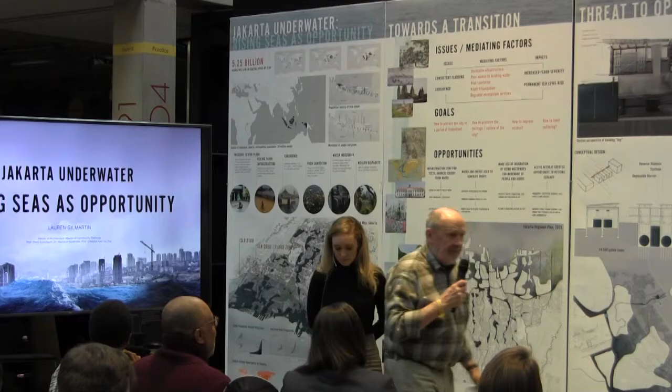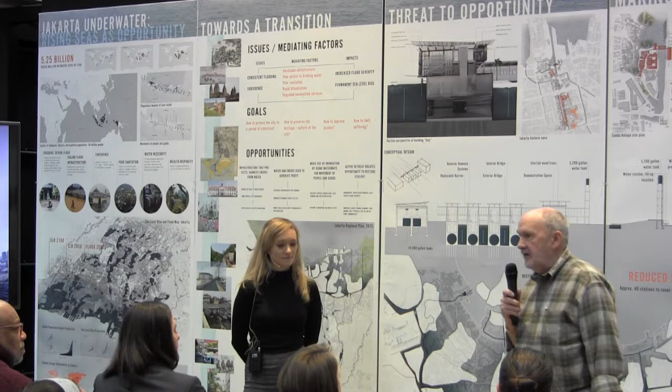What is the thesis process? Last semester, these students did research. They wrote documents, visited sites, and looked at precedents and examples that would inform their thinking. They put together a series of chapters on each of those topics, site analysis, program analysis, etc. This semester, of course, they spent all their time designing, and then at the end they clean up all their pre-thesis work and put it into a nice package so they can inform you about their thought process. So it's essentially a one-year exploration, but the actual design is really just one semester. The production is geared that way.

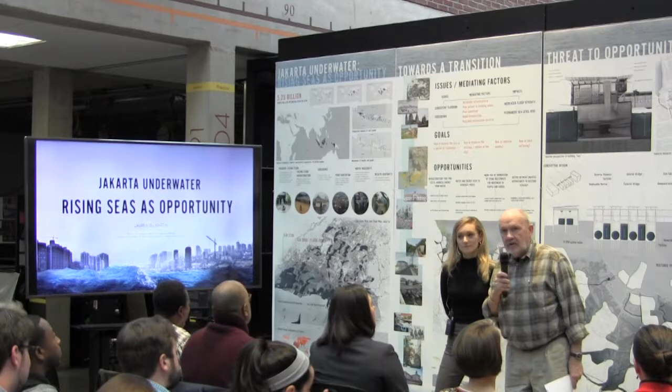Now we're going to go over to the other side of the world to Jakarta, and we're going to look at a place that many of you have probably read about, this whole decision about whether to save Jakarta or move the capital, and what we're going to do about climate change and the rise of sea level. So Lauren's going to take us there, and thank you.

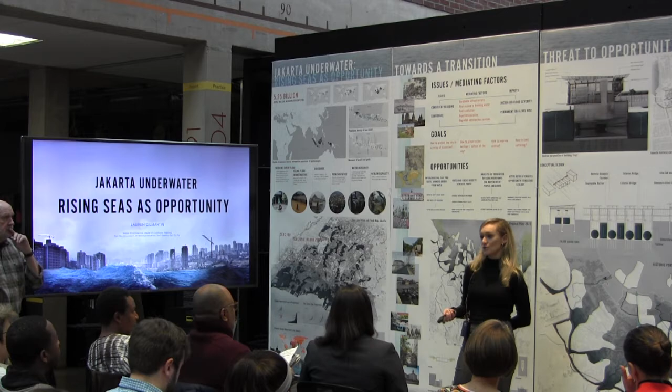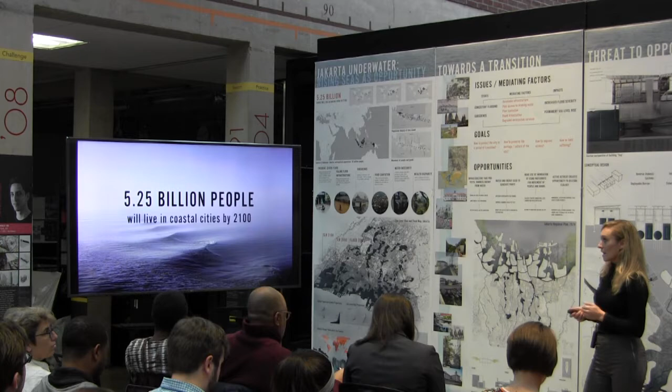Jakarta underwater, rising seas as opportunity. Today I want to talk about a statistic that I read in a UN report that said that in the next 75 years, 5.25 billion people will live in coastal cities. And this won't be uniform across the globe. Today our largest cities are New York, Mexico City, Manila, Tokyo, Jakarta, etc. But this global shift and boom in urban population will actually occur in the global south.

This growth is going to occur in Asia and Africa, primarily in developing cities where infrastructure has not kept pace with urbanization. To give you an idea of why this is a topic we should be talking about: 1 in 4 people in cities live in slum conditions globally. 9 in 10 people in cities breathe polluted air. Only 38% of cities treat their wastewater. 50% don't have access to waste collection, and 785 million people globally lack access to clean drinking water.

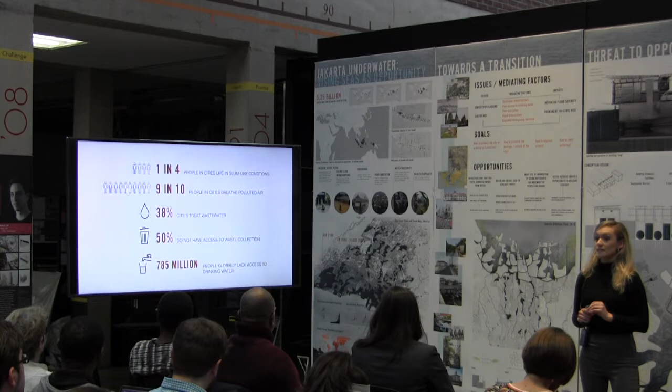This is true for Jakarta, Indonesia, and I'm going to go into some of these challenges. But before I do, I want to take you all on a trip to Jakarta and talk to you a little bit about my research and what I observed while I was there.

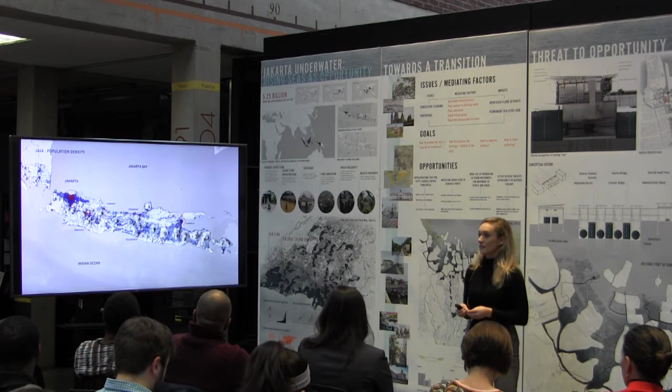Jakarta is the capital city of Indonesia. It's located in the Pacific and Indian Ocean. It exists on the Java island of the entire archipelago. Jakarta has a population of about 30.8 million people in its metropolitan area. It's of course the capital, and it's the most populated city in Indonesia.

And it has this really rich and interesting history. It's been settled for a long time, originally as a port city, and has undergone many influences, including colonization from the Dutch, occupation from the Japanese during World War II, and finally gained independence in 1945. It has a really rich maritime culture that began many years ago and still exists today. It was a really important stop along maritime Silk Road trade routes and the Dutch East Indies trade routes, and it primarily traded cloves, cinnamon, coffee, etc., and fish too.

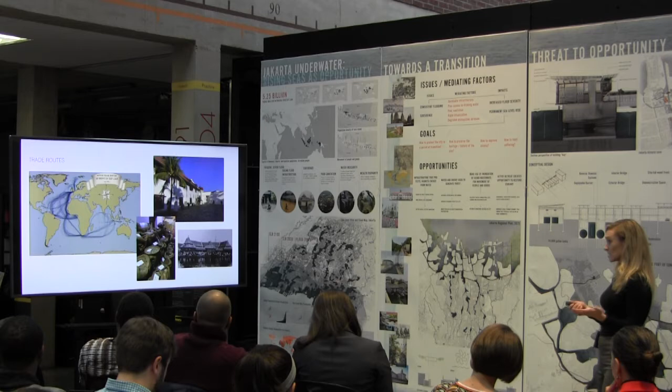Today, while walking through the city, you can really understand and see all the influences that the city has experienced over time. It's a really rich culture of different demographics and economies. You can see the old Dutch architecture, experience the maritime culture, and see some of the ancient mangroves. It's a really interesting and beautiful city.

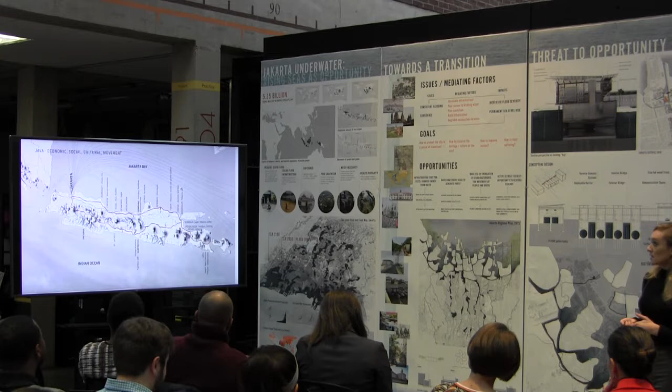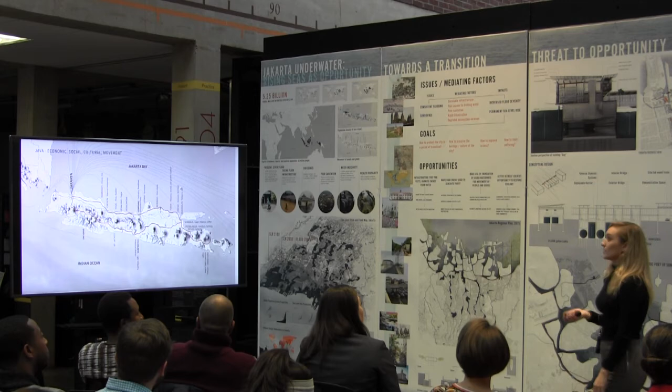Jakarta today is still a really important stop in trade routes. It's the one city in Indonesia that still serves as its export port. So all of the goods and services exported from the country come to Jakarta and then are distributed throughout the world. It's still a really important economic city globally.

Jakarta's main historic core was developed mostly during colonial rule, but its largest urbanization period actually began in 1970, and from 1970 till today it's exploded and become an extremely urban, dense environment. That rapid urbanization has led to some really big challenges that the city is facing today.

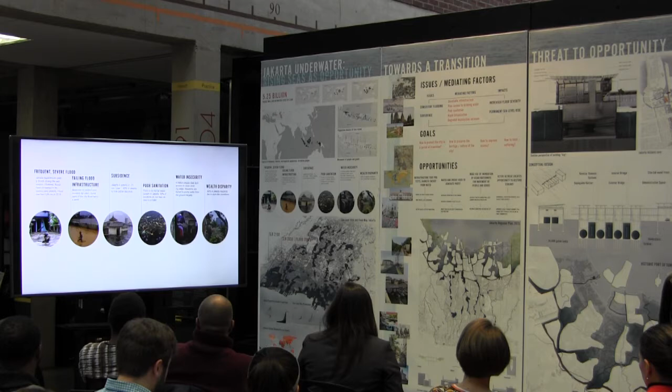Frequent and severe flood is a common problem. Every year the city floods, and some parts of the city flood almost every week. The city has experienced frequent and severe flood more consistently and more frequently. There's a lot of failing flood infrastructure in the city — mostly seawalls, trash piles, and sandbags that keep water out of inundated areas.

There's very poor sanitation here, so the city doesn't have any formal waste system. Only 30% of residents have access to a toilet. So sanitation and pollution is a really big problem in this city.

This extreme pollution has caused severe water insecurity. Even though there are 13 rivers that run through the city, every single one of them is very polluted and too polluted to drink from. This water insecurity has left 5 million people in the city without access to water. Most water in the city is not piped, it's actually pumped out of the ground, and the way residents are getting water is by pumping it illegally, which is causing severe subsidence in Jakarta.

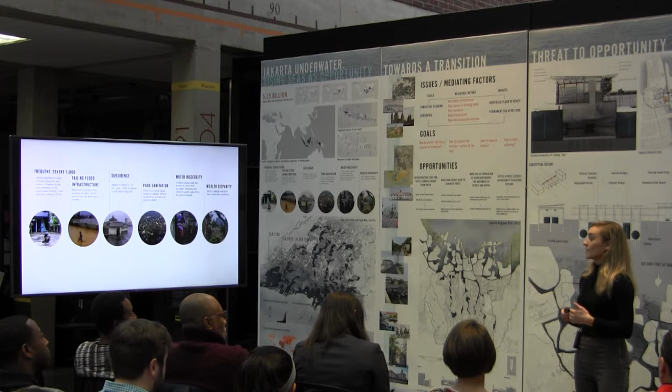Parts of Jakarta actually sink up to 25 centimeters a year, and you can really see this throughout the city. These are all challenges that the city faces today that they'll have to deal with in the future.

In addition, these are some of the observations and obstacles I experienced while traversing through the city. The sanitation problem is really apparent. There's a lot of physical and dangerous barriers that make it hard to walk by foot in the city. And you can really understand the poor housing conditions and the threat of flood when you're walking through.

Compounding all of these challenges is the threat of sea level rise in the next 25 to 75 years. The dark blue areas here represent frequently flooded areas. This pink line represents projected flood by 2050, and the second one behind that is projected flood by 2100.

Because Jakarta has experienced this sinking problem, about 40% of the city already exists below sea level. So even though sea level rise is a problem in the future, Jakarta is specifically at risk because any failure in its infrastructure can completely flood the city and totally cause a challenge here.

But this isn't a problem specific to Jakarta. A lot of cities are going to be experiencing this threat in the future. Mumbai, Lagos, Shanghai — many cities are going to experience the threats of sea level rise in the coming 75 years.

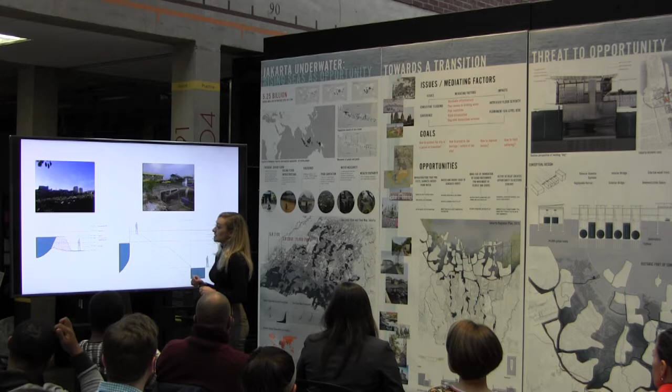Just to give you a little bit of an idea of the subsidence problem in this city, these are some of the areas that I documented while I was there. Most places in the city are holding back water with sand piles or trash piles, so of course not a reliable flood infrastructure technique.

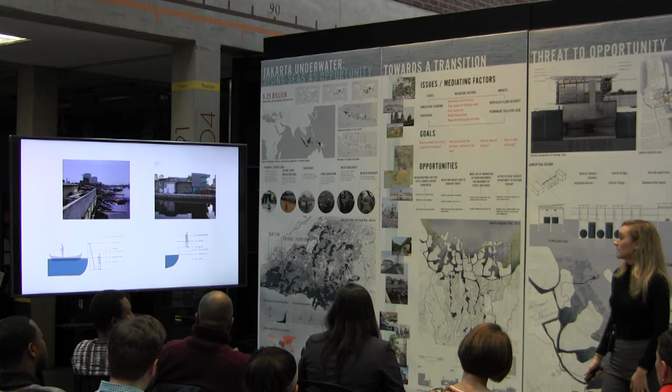There's a few pumping stations in the city, mostly seawalls along the north coast, and then a couple of bulkheads that bring you about 2 feet above the average sea level, but that of course doesn't block flood and sea level rise in the future. So we're going to have to rethink about how this city can protect itself in the future.

Recently, Indonesia decided to move its capital from Jakarta to another island to escape these threats, investing $26 billion into a brand new city. However, this investment doesn't include the relocation of its residents, so 60% of the city that can barely afford food, water, and housing will be left to fend for themselves when the city ultimately moves.

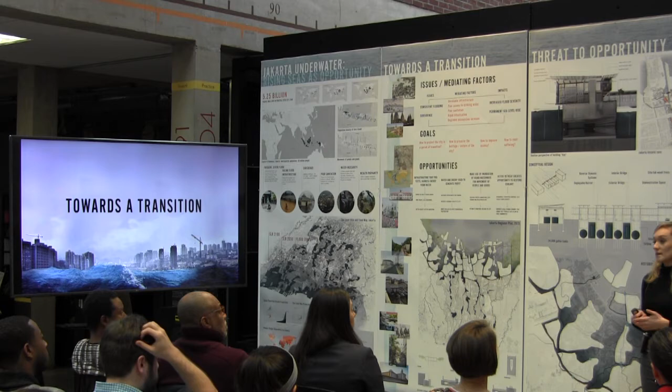So we're going to have to think about how the city transitions through a period of challenges and severe threats. Today I want to talk about how this transition can, instead of being viewed as a threat, be turned into an opportunity and used as a case study for how cities globally can deal with this problem.

Just to recap, some of the issues we're talking about here are consistent flooding and subsidence, which will ultimately cause increased flood severity and permanent sea level rise.

But there are factors in between that we can mitigate that could slow or halt these effects in the future: unreliable infrastructure, poor access to drinking water which causes people to pump out of the ground and leads to sinking, poor sanitation, rapid urbanization, and degraded ecosystem services. All of these can be attacked as problems to help slow this process or halt it altogether.

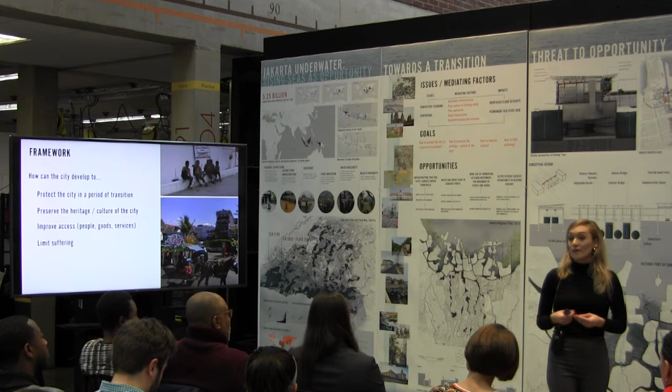So when we think about how a city can develop with these problems, we want to ask: how can we protect the city in a period of transition? How do we preserve the history and culture of the city? How do we improve access to people, goods, and services, especially in a city where it's really hard to get around, like Jakarta? And how can we limit suffering?

So something my thesis looks at is how these threats can be turned into an opportunity. I want to talk about a couple of opportunities in Jakarta that we can capitalize on towards development.

For example, the first opportunity I want to talk about is traditional approaches to infrastructure.

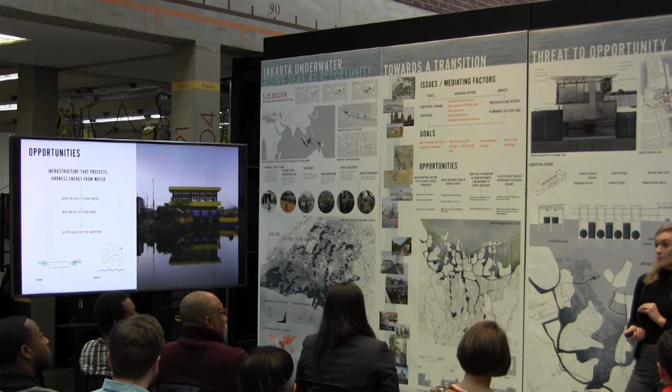We can implement infrastructure that not only protects, but harnesses energy from the water. In Jakarta, water has always been seen as an asset, so why not use it here as an asset as well? We can harness energy from water to create clean drinking water, which causes less subsidence and ultimately leads to better health and better sanitation. That water and energy can actually be used to generate a profit, and that money can be used to maintain infrastructure.

A secondary opportunity here is making use of inundation by using waterways for movement of people and goods. There's already a maritime culture in the city, and people get around by boat, so why not take advantage of this opportunity? It also relieves traffic congestion, which causes less carbon pollution. It makes a better city, so why not look at that as an opportunity?

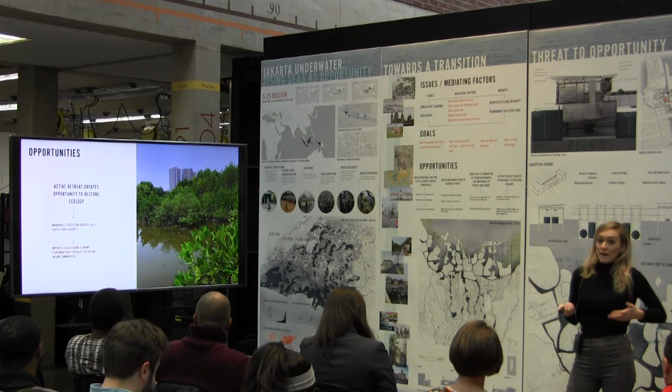And then finally, active retreat from dangerous zones creates an opportunity to restore ecology. Mangroves, of which there are already some in the city today, provide really important ecosystem services and reduce flood severity. And of course, local fishermen, which represent a huge economy here, can benefit from this development.

So I want to revisit a flood map of Jakarta versus a sea level rise map. I've looked at many scenarios about how Jakarta could develop in the future, but for the purpose of this presentation, I'm just going to focus on the one that I think is most feasible.

You brought me water. Oh, thank you.

Okay, so this is my vision for the future of Jakarta by 2075. I'm going to walk you through how I got here.

So I overlaid a map of common flood and sea level rise, and thought, okay, how can we adapt the city to take advantage of some of these areas?

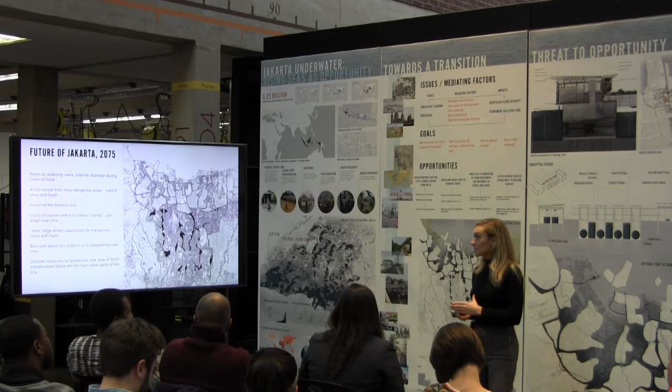So the first move here would be to widen rivers upstream so that you can automatically alleviate the impacts of flood. Next, you can build infrastructure islands in areas that either should be protected, like historic areas, or areas that aren't commonly flooded. And then finally, when water inundates over the next 50 years, the city is protected.

And the best part about this scheme is that it's adaptable over time. These islands that we're creating can be changed and adapted based on a changing future.

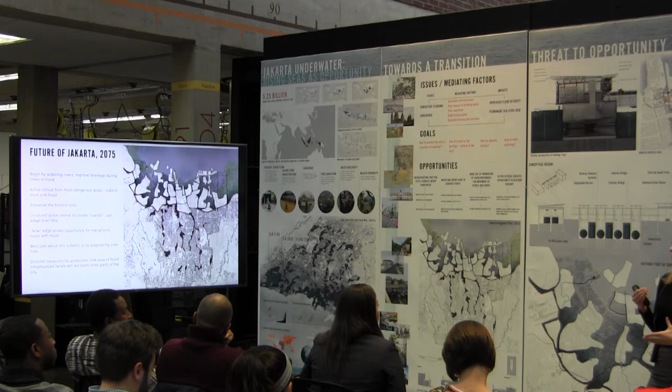And finally, this scheme helps to double protection from flood, because when infrastructure exists on an island, if the infrastructure of one island fails—and infrastructure does fail—it doesn't impact the rest of the city. Whereas something like an outer seawall dike, if it fails, it would totally flood the entire city. So this is an adaptable solution for the future.

So these levees can be used to improve access to the waterfront and create an amenity for the city, and preserve the historic core.

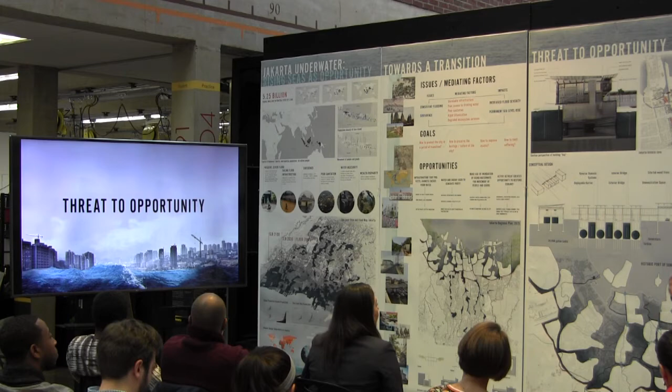So how can we actually do this? What's going to be the technology that we can use to actually implement this future? And how can we turn this threat into an opportunity?

So there are a lot of possibilities here to take advantage of energy from the water, to protect the city, and to provide clean drinking water to its citizens.

And I'm proposing to use tidal energy, which can provide energy to produce water through a reverse osmosis system, which can be combined with a deployable flood barrier to change with adapting sea level.

This reverse osmosis system is a perfect solution for Jakarta because it's compact and adaptable and can produce a lot of water at once. So one 40-foot by 9-foot system can produce 105,000 gallons of water.

It has a quick 4-year return on investment, and after that, a gallon of water can be sold for 0.007 cents, which is less than the average cost of water in the city. So not only can it be used to generate profit, but also provide cheaper water for the city too.

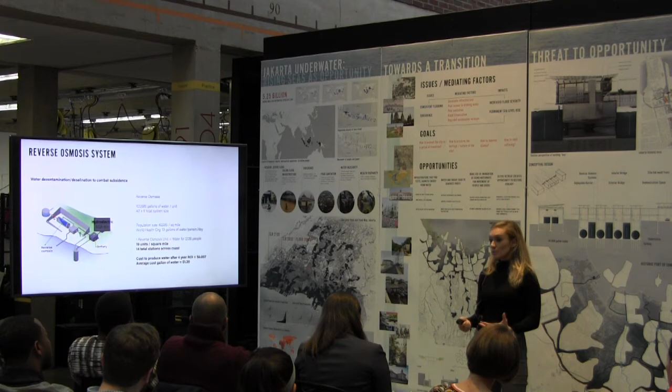So this reverse osmosis system would be powered by a turbine technology that actually makes use of subsidence and changing sea level to create energy.

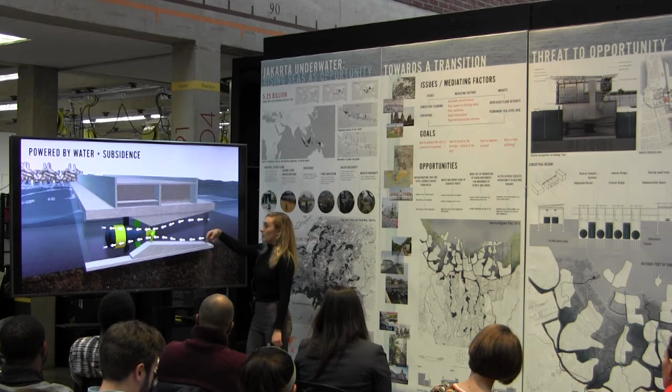So as water rises on one side, this turbine can be opened to produce energy with water coming through the other side, and vice versa, so it can flush water in and out.

So an opportunity for implementation: there are many opportunities around the city that can be used for implementation, but the best one for first deployment would be at Sunda Kelapa, which is the historic port in Jakarta.

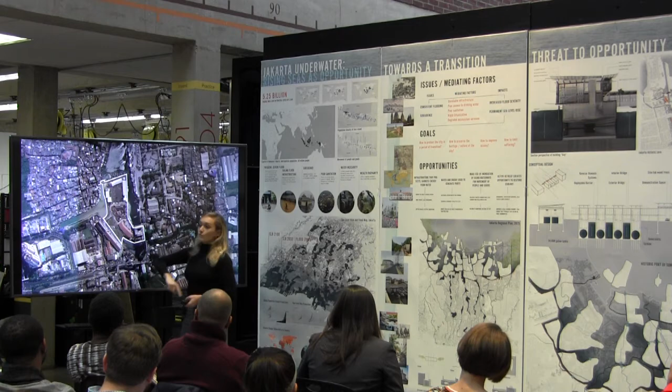This is an aerial view. So the concept behind my design here is that this building can serve as a bridge between the fishing community and their place of work.

And these reverse osmosis modules can be multiplied across that canal with a distribution portion and a demonstration portion that bookend the reverse osmosis systems.

So the way this building would work is there would be these turbines that exist in the water with deployable barriers in between that can move up and down with changing water levels. And above these are the reverse osmosis systems that are powered by that energy.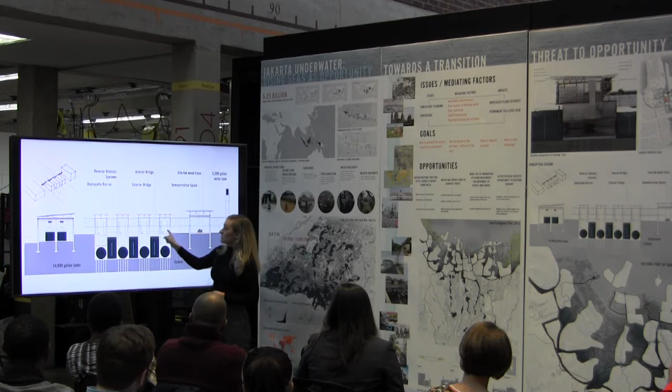And then there's a bridge, an exterior bridge and a service corridor bridge on top, that bring these programs together.

With this building and the way it's set up with a bridge between two, spanning the historic port of Sunda Kelapa, this building can now serve as a symbol, as a gateway to the city. So it exists on the historic core of the city.

So when you're coming down the canal, you can pass underneath this building in times where there isn't flood. That barrier can come down, boats can pass through, and you're passing through this gateway into the historic core of the city.

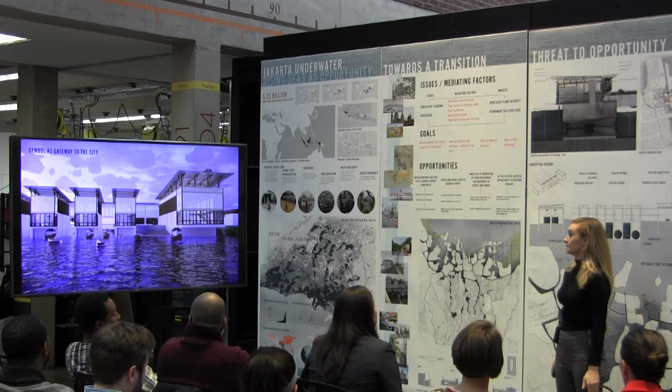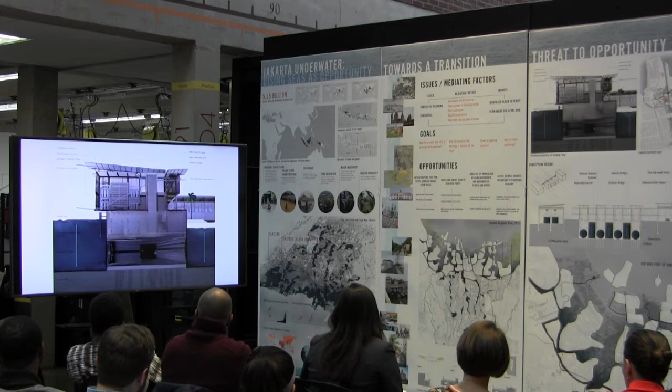This is a section through one of those modules, through the turbine and the reverse osmosis system. So as water rises on one side, those deployable barriers can come up, and the turbine regulates how much water can come in and out of the city and produces enough energy for 150,000 homes.

That energy can be used to produce the drinkable water, which is then distributed in the service corridor on either side of the building.

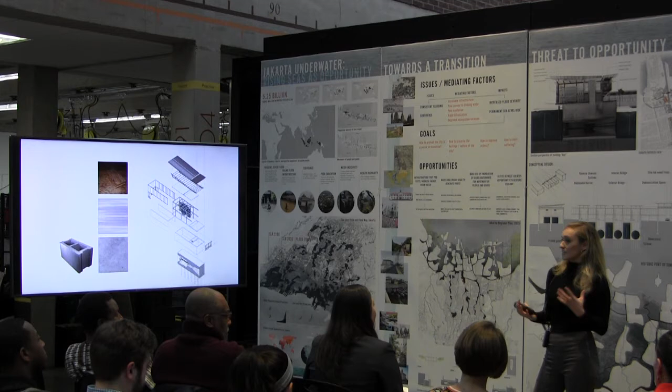So the structure is extremely simple. The base is a concrete base, and everything above it is polycarbonate panels and kayu kelapa, coconut wood, which is sourced from Indonesia. It has this really beautiful, fantastic grain on it and is used in traditional Indonesian architecture, so it calls to and identifies with traditional architecture, beckoning back to the history of building and wood architecture in this city and country.

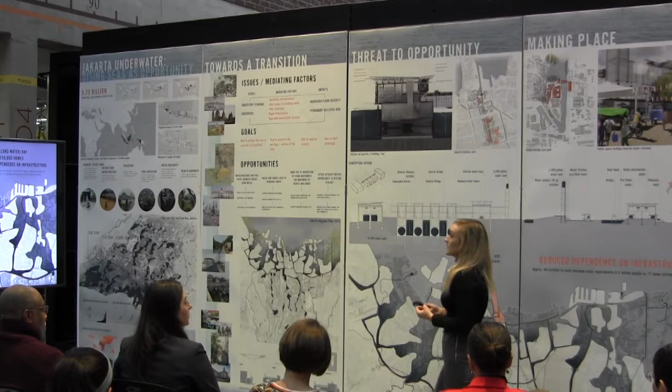So this is a repeatable scheme. It can be repeated across the city to provide those 5 million people who don't have access to water with water stations. One of these buildings can produce almost 1 million gallons of water a day, enough to service 60,000 people in 1 square mile. Again, it powers 150,000 homes. While 40 stations seems like a lot, it actually produces less dependence on infrastructure, because right now this city depends on 71 pumping stations and 159 flood barriers.

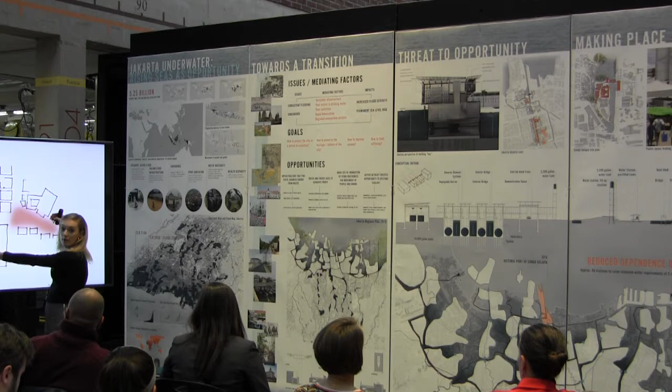So this building isn't only an infrastructure building, it can now be used to make place. The building sits along the canal and can open up onto 2 public spaces on either end of the bridge. The demonstration space side opens up onto a community, and the opposite side opens up onto an existing mosque and can service the people that work in the port.

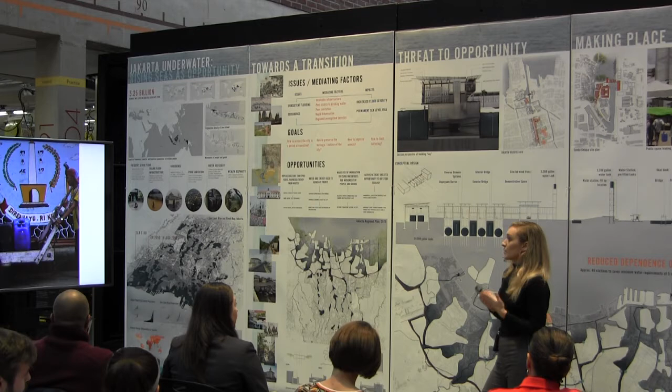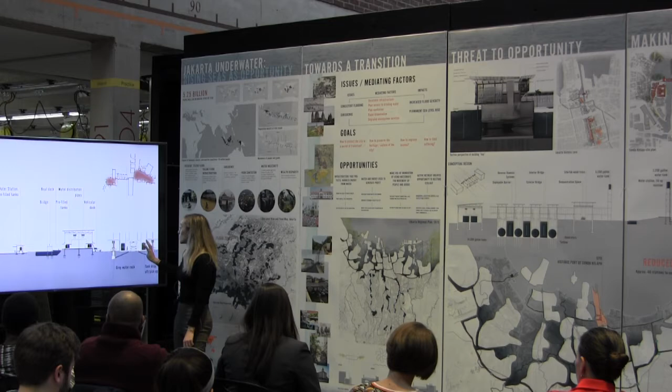Water distribution in the city is a really important topic because there is very little piped infrastructure for water, so water is distributed mostly informally by people in carts with water tanks. Why not take advantage of that and provide more economic opportunity by creating more jobs for water distribution like this? This is a view from the public space on this side to the water tower, where people can come fill up their water tanks. On the opposite side, boats and trucks can fill up their water in the distribution center. And finally, water can also be distributed by trucks that pick up and drop off tanks.

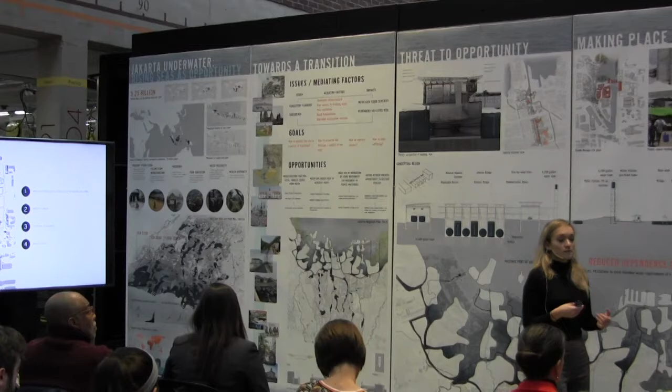Because this water now exists in this community, it can support other functions. With the availability of clean drinking water, why not also provide a bathhouse for people who don't have access to a toilet? My proposal here is to build this water plant that can service a community and a public bathhouse, so people have access to toilets and showers, creating a community space where this building reinforces an existing community.

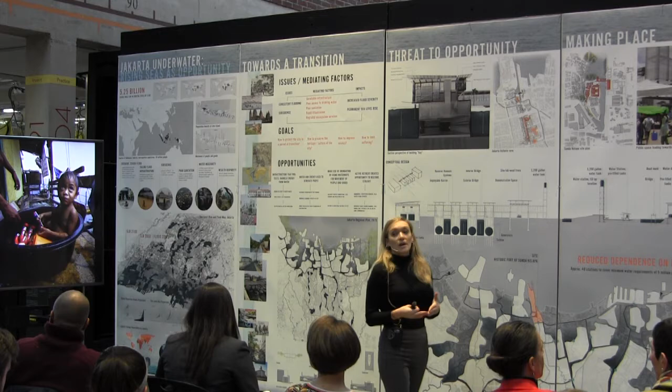The challenges of water supply and cleanliness make simple everyday tasks really challenging in Jakarta. $5.25 billion was spent last year by the Indonesian government to deal with the impacts of poor sanitation. So why not use this building as an opportunity to provide these services?

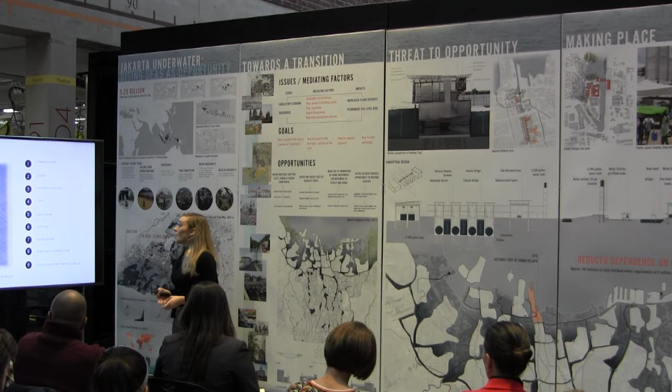My proposal is a community bathhouse, one for men, one for women, that provides a variety of spaces: a community space, laundry as an option here, a clinic where a traveling doctor could administer vaccines, a prayer room, individual bathing rooms, an infant room and a nursing room, and an exterior courtyard that creates a protected space for this program.

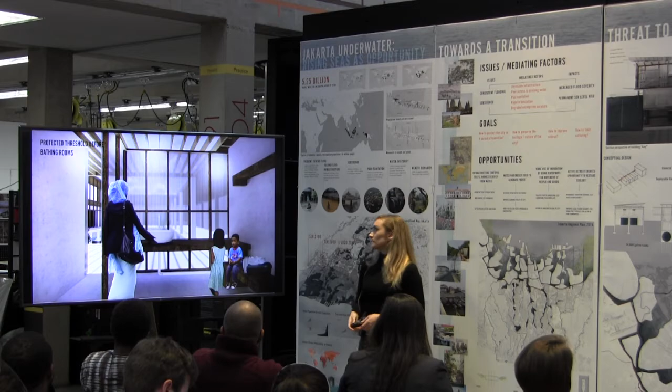And then finally, upstairs, flexible classroom and daycare spaces. This is a view from that protected courtyard with the individual bathing rooms behind these boxes, and a view from the inside.

This is a section through the site that explains how water is used here. Water is generated and pumped to either the distribution center or the water tank. This water tank services the bathhouses that come down the site into their own gray water and freshwater tanks. Those tanks service the bathhouse, and any wastewater is then funneled into an anaerobic baffled reactor, which cleans the water. That gray water is then released into another natural filtration system and can be used for toilets.

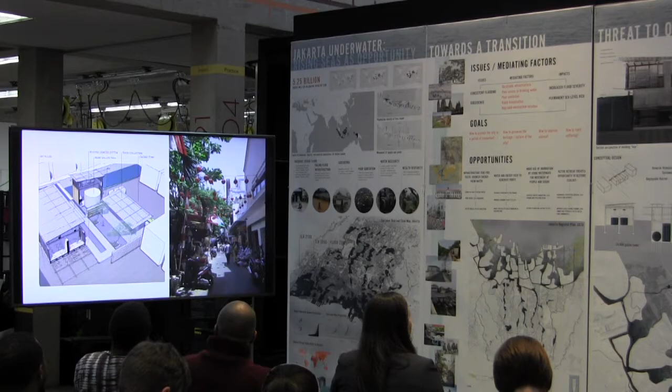This scheme is not only repeatable, but can be adapted to different conditions in the city. So where there are neighborhoods that maybe don't have as much space, or maybe canals aren't wide enough for the larger turbine system, there are other options for adapting this scheme to different conditions in the city.

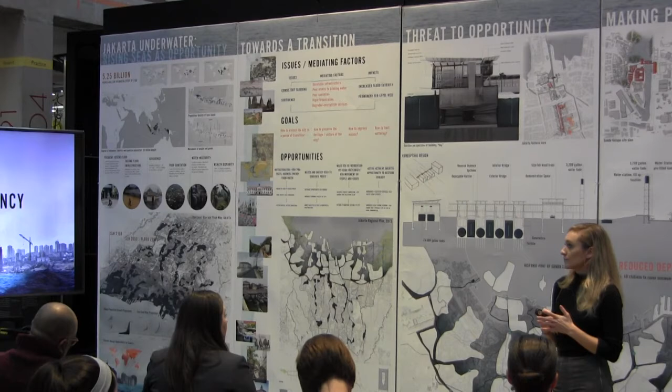And to finally talk about towards resiliency in Jakarta. So as the city transitions and people have to move or actively retreat from dangerous areas, we're going to have to think about how these communities can resettle elsewhere in better conditions. So for example, if the site is here, the community that lives in this area can actively retreat and resettle here.

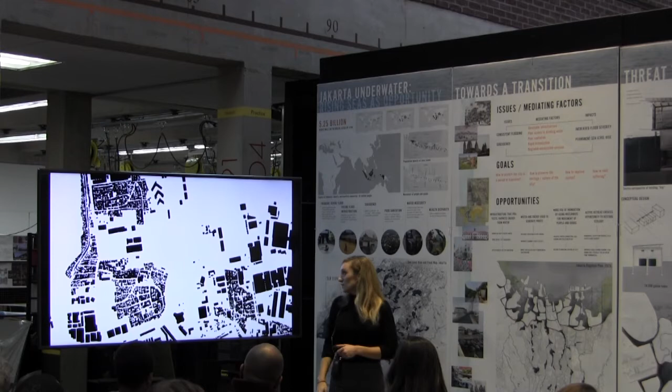Here's a figure ground. That area is right here. These are some of the housing conditions of that neighborhood. And something that I would really like to point out is that these neighborhoods are so packed and condensed that air and sunshine can't get into these houses.

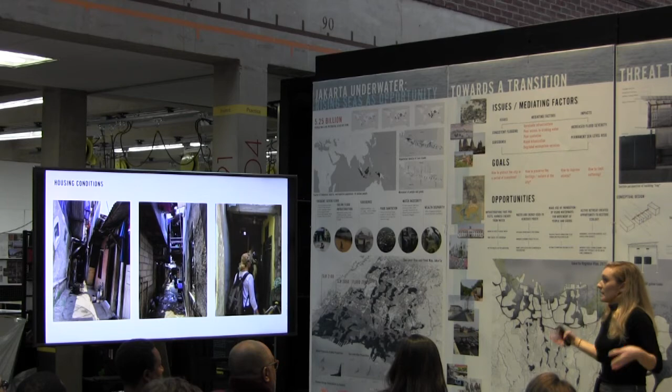So the typology here, the housing typology, is a block of homes, sort of like a shotgun style, but one family per room. And most of these alleys are about 8 feet wide, so it's really hard to get air and sunshine into these spaces.

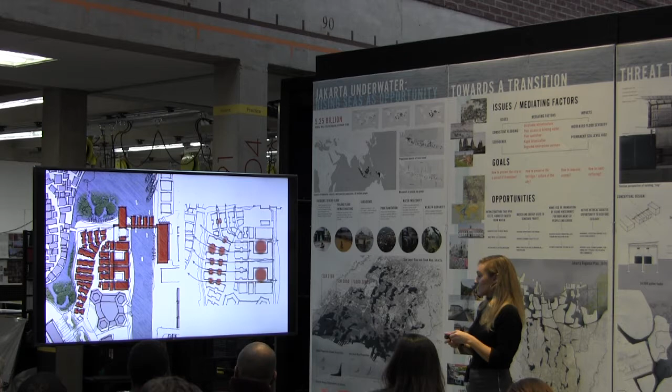So my proposal makes a slight modification to that typology by introducing courtyards. The way this would work is that families can get a 2-room unit that can then grow and adapt over time. But the important part here is that trucks can get in and out with a 9-foot driving corridor so that they can service the showers and toilets here.

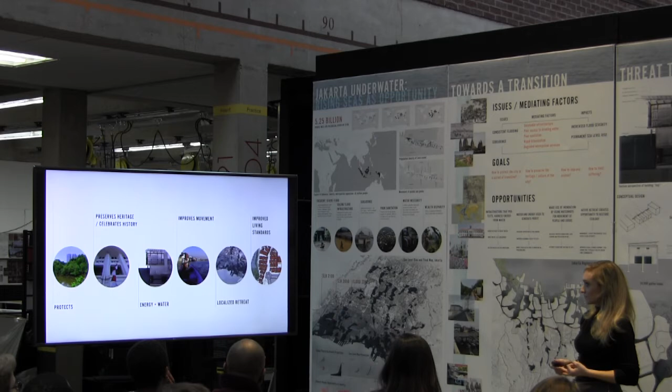So in conclusion, this project attacks the need to protect a city, preserve its heritage and history, produces energy and water in a city that really needs it, improves movement, provides a strategy for localized retreat, and improves living standards. And finally, proposes a solution that is practical and sustainable to promote healthy and dignified living with spaces between them that encourage community vitality. Thank you.

Where's that mic? No mic?

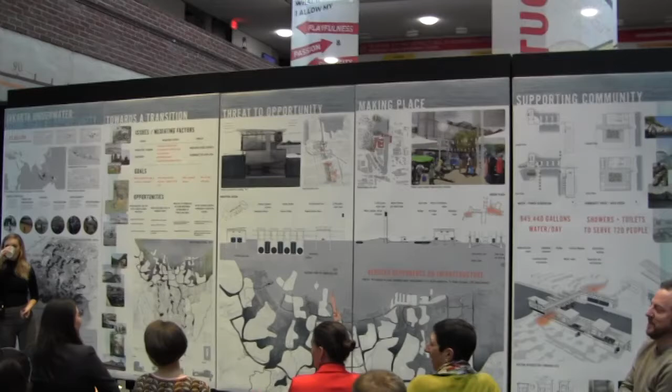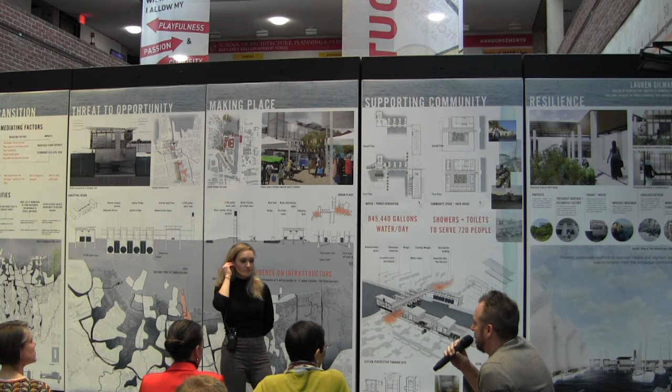Yeah, wow. So I don't usually just like to gush on a project, but I just have to start with that because it cannot be left unsaid. Like, this is a thesis, and the level of thought and the kind of importance of the thought and the way that you carried it out, from strategy to thinking to detail to execution across every scale, is incredible. And every time I thought you'd be done, you added something else that I would have said, hey, did you think about this? Like the bathhouses, and then the housing, and then, oh, by the way, I took this thing and I moved it over here and made it a little bit smaller, and like, wow, I'm impressed. I literally feel a little jealous of your thesis.

I agree. It's kind of mind-blowing how you've gone at all these different scales. It's also mind-blowing to look at these islands of cities and wonder what they'll be like. But that's not really the part of what we're here today to talk about.

Is the housing plan that you showed at the end here? Or No, it's only, yeah. I'll just get back here. Yeah, the units are up there. Right. I mean, this was just the final grace note that you even got down to this.

So I really just have questions at this point. The turbine technology exists? Does exist, yeah. And the economics of it? Have you had a chance to? That's a little unclear. Yeah, it only exists in one city in Swansea Bay, Wales, and it's pretty new, so we'll see how it goes in the future. But tidal energy itself as a concept is used everywhere. So this is an interesting way to take advantage of not only changing sea and flood, but also the subsidence issue, where there's already a great change in water.

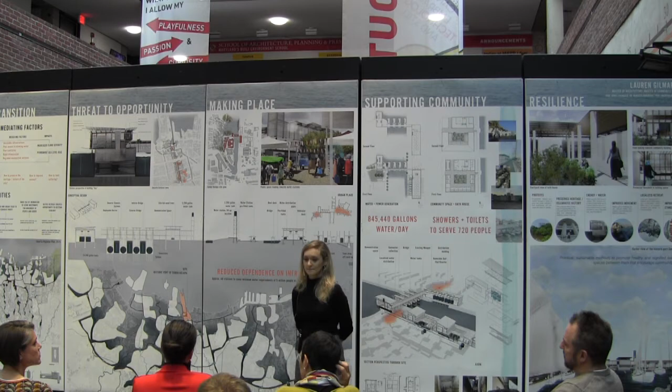Yeah, I mean, visually it's extremely clear and consistent and a beautiful presentation, like graphically beautiful presentation. Your drawings read really well. I appreciate that there's some hand stuff in there as well that are just simple and basic to show the ideas. The one tiny little bit of critique I would offer is just thinking about the aesthetic from this perspective of the historic district, and if that is kind of a main one or a primary entrance, does that have a bigger expression for it, or is it truly that these are just adaptable and they're the same thing everywhere plunked around?

That'd be the only thing I would ask. Yeah, and I think that's a question I've wrestled with throughout the semester: should this be something that's really affordable, or something that's a little more aesthetic? I mean, aesthetic and affordable can be the same, but you know what I mean. What should this thing look like, but how can it also be adapted over time?

So I'm also struck by the scope of what you've addressed, both the scientific aspect and the urban planning aspect. I particularly am interested in the housing aspect. I appreciated that you provided improvements for the residents who are being displaced. That's always a concern when you try to improve something in an urban setting—you end up affecting the people who live there. So you've given them opportunities as well.

It's a little depressing, though, that the issues we're dealing with here are the same issues: access to light and air, overcrowding, sanitation. Those are the same photographs that were taken 100 years ago by Jacob Riis in the U.S. So in a way, nothing has changed, even though we've thought about a lot of these things. But it's great that you're addressing them comprehensively and providing a solution.

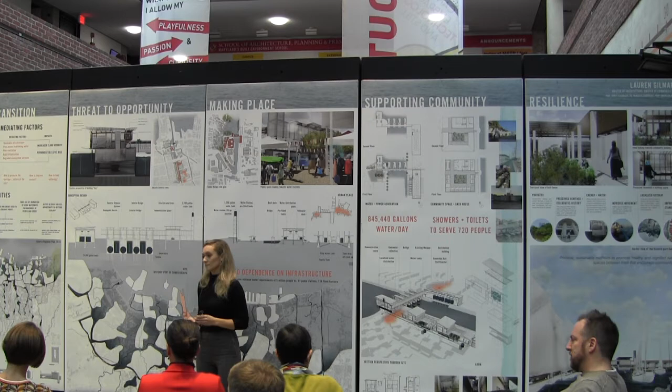So I would echo the praise that's gone around. I think from the global perspective down to the actual local and livability, you nailed it. So congratulations on that. Very wide-ranging, and maybe my one thing that I focused on, probably because I threw out my back this weekend...

...was the one thing I still see is people carting around water jugs. And I think, well, okay, if we're putting in all this infrastructure, are not some pipes a way to manage some of that? Because I think about people aging and being able to manage water in that way, and carrying around—I don't know how much those jugs weigh. But yeah, I think that would be an issue.

But beyond that—you can address that if you want to—I would just say that I love how your perspective renderings, even though they're computer generated, really feel like occupied spaces. They look realistic, they look livable, I can believe that they are implementable, and they really show your deep understanding of how people live here and what challenges they're striving through, and how we can help improve them with very logical, implementable solutions.

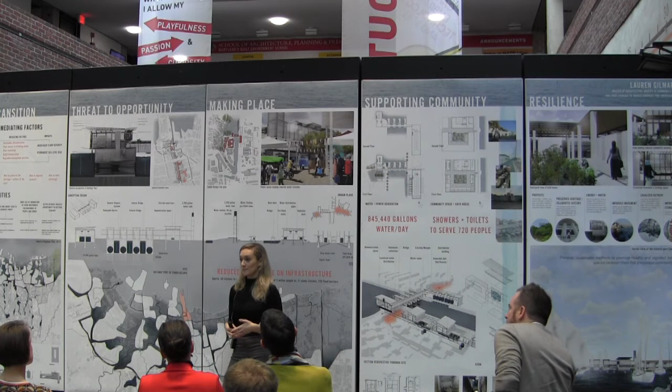But yeah, you can address the water jug, I'm sure you have an answer for that. So, like I said, water in Jakarta is privatized. There's no real municipal service—well, there is one, but it only serves about 3% of the city. So the idea is that this building could be implemented today and work within an existing system. But of course, over time, it would be ideal if a pipe system could be hooked up to this building.

And the others that could be multiplied across the city, and then, of course, better distribute water throughout the city. That's funny, I was just thinking of it as sort of like each one of these is a little franchise in a sense, that can expand and contract depending on the actual location and the width of the canal or space. So it's really good that you came up with a prototype that can be adapted depending on where it's located on your islands. So it's pretty good to see that.

Thank you. You really demonstrated your double major with this project. It's a really good demonstration of both majors, architecture and regional and city planning. So I applaud you for that. Thank you. Very nice, very good presentation.

I don't have much more to add, with the exception that one of the diagrams or the analysis I would have liked to have seen—and you probably have it—is identifying... you made it clear that 60% of the population is impoverished. Where's the 40%? Where is the 60%? Where are these pockets of people? Are they dispersed?

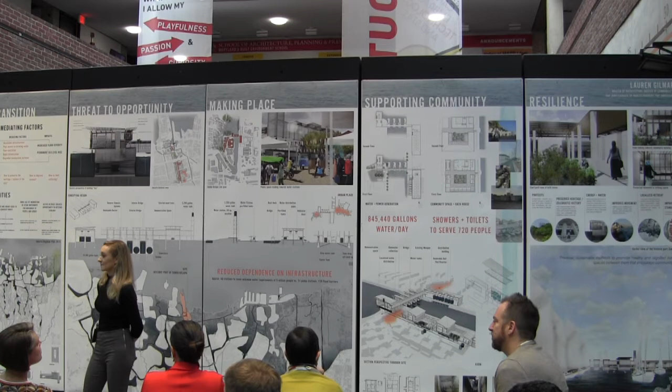Are they collected? How is this segregated city portrayed in an analysis? That would have been helpful to see how to attack that. And that's especially important with this idea of equity and trying to resolve these environmental justice issues.

I suspect that, and I hope not, but I suspect that many of these interventions might be happening in areas that the wealthy might live, or the corporate sector might live, that kind of thing. We certainly would not want that to be. Yeah, it's really interesting actually.

This reservoir that you see here, half of it is a slum and the other half are mansions. And the mansion side has infrastructure protecting it against the sea, the other half has nothing. So that really demonstrates the injustice in the city.

I suspect you picked the place and then found the problem. Other way around, interesting. So this is what you were interested in doing, and then you found the right place where you felt that this was, oh, that's interesting.

I think you should package this up and send it to the mayor of Venice as soon as possible. Given the problems that place is having, they do have a very large project to control water going into the lagoon. It's unclear whether it's going to work. Yours seems like a scale, and that's an enormous thing that they're putting at the entrance to the lagoons, and I don't think they've started building it yet, but clearly they have similar issues.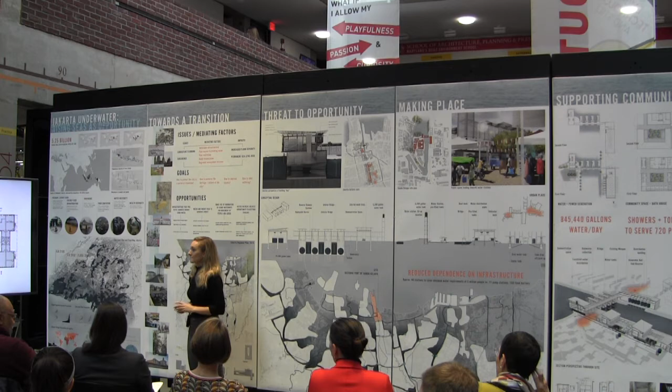It's interesting you say that, because I think one of the nice lessons of this project is the sort of way in which a thesis evolves. The thesis idea, and then trying to find it, and by the way, it's a beautiful project.

Thank you. One of the interesting things about the thesis process is that those intersections that happen along the way between what you're interested in and what the place demands of you. It tends to exist whether you're interested in it or not. The problems of Jakarta are there whether you do a thesis project or not. But what's nice is, I think, in the project is the fact that not only is the problem, a global problem, addressed, but also brought to a kind of very clear synthesis of what it means to this particular place.

It also makes me think that architects used to be much more engaged in problems of civic infrastructure. And it could well be that some of the imperatives today with climate change may in fact force us to become more engaged with those things.

It used to be that architects built power plants and built beautiful roads and things like that. And we did a pretty good job after World War II, because of the way the sort of scale of the world economy evolved, of consigning that to engineering and specialists and things like that.

And what I think your project does very nicely is it shows that you could actually intersect very important technological invention with placemaking and the architecture of the place.

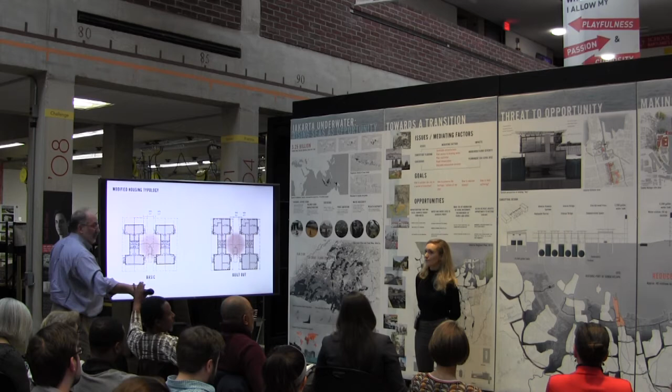Yeah, and just to add to that, I was originally interested in coastal cities because I was interested in the infrastructure piece. The water, energy, and sanitation part didn't come into play until I learned about the other challenges in Jakarta that you need to deal with to even start talking about infrastructure. So this project has evolved into something that tries to tackle other issues.

Just a follow-up question of interest: what happens with the submerged cities? I feel like there could be a whole industry built on exploring those, like marine archaeologists. But are some of those materials reclaimed? There are some nice city grids that are now underwater, but there's a lot of built material too—what happens with that?

And to add to that, my project has sort of been about: is it feasible to save the entire city? Should we just draw the line at the 2100 flood level and stop there, and everybody else has to retreat? Is that feasible? That brings up other problems—if the entire city is flooded, it's not just water now, it's buildings and water. So what's the right balance of reclaim, protect, and let go?

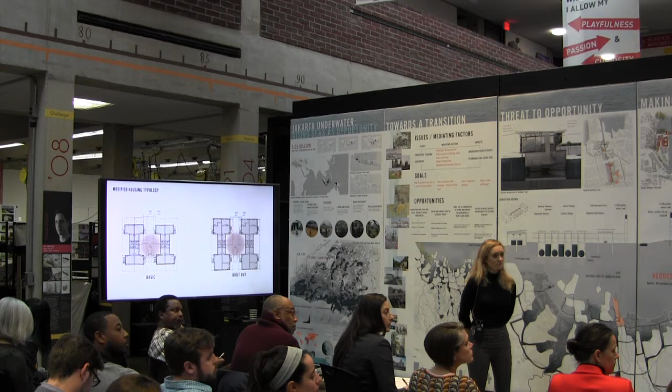Yeah, I had a similar question. I actually think this one example looks like something that could exist there—using the wood and the kind of form of it and the way you're making windows and surfaces. You showed a couple of images, like the one up there. I think the next part for me would be wanting, similar to past conversations, to really understand how this fits into the architectural strategy—materials and color. There was a beautiful waterfront building that was blue and gold; it was formally very similar, but a lot more colorful.

So I could imagine that being the next step—you've got all the pieces, you've solved the planning strategies, the scale, and the program. The next thing is, how could you push it? Is it a prototype that's replicated ad nauseam, or does it get redesigned using the same kit of parts but in a different way each time, depending on the neighborhood?

Yeah, I think it should definitely be able to be adapted, and the community should have some influence over what this looks like and how it plugs into an existing urban fabric. My goal here was to propose something that is simple, affordable, and realistic.

And if there was an opportunity to improve it or do something bigger and grander, of course that would be great. But after going there and talking to planners and engineers working on this problem, they all said that no matter what solution they came up with, it was always a challenge to produce something feasible within a time frame that would actually work in Jakarta. So my goal was to design something that could be implemented immediately and affordably.

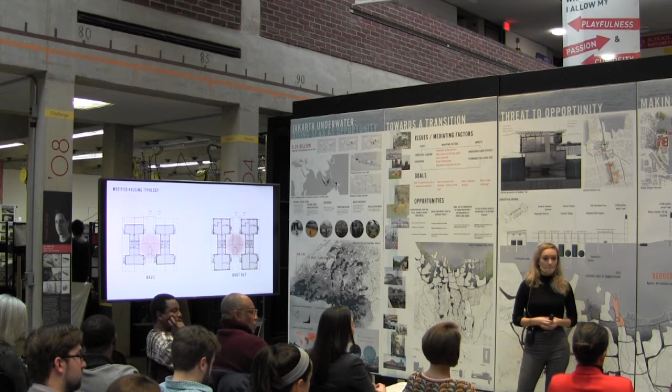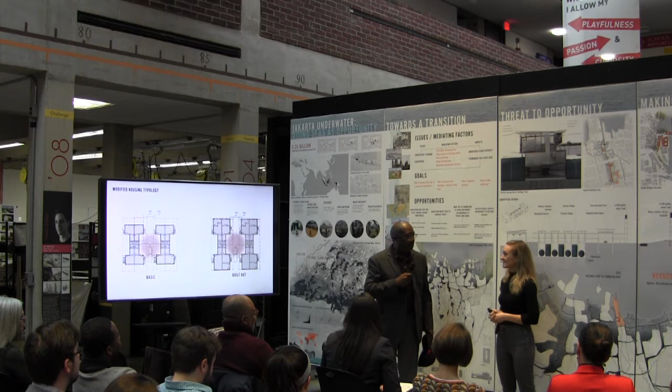Thank you, Mel. From all of us to you. Thank you, Mel. Good job. Can I give you a hug?

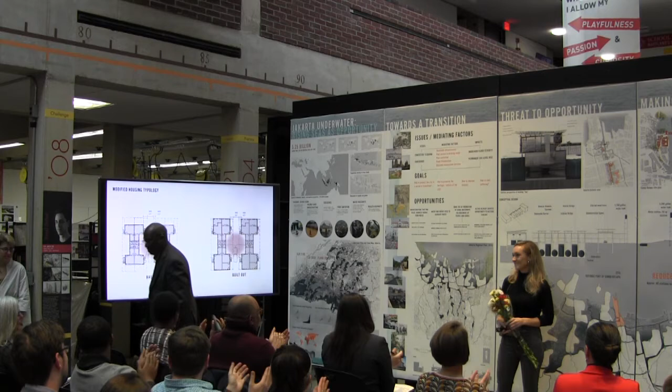Marcus and I co-led this, since Lauren is a dual degree student. So Marcus, would you like to say something? Yeah, I just want to say how grateful I am to have had the opportunity to serve on Lauren's committee. This has been a pleasure, and her ability to really demonstrate effectively the skills that she's gained through both architecture and planning. She did a remarkable job.

I also appreciate how she took us through some of these global environmental problems and potential solutions, but also took it down to a hyper-local level in terms of the reality of these things actually being implemented. Because we had discussions that even within Jakarta and the local area, from block to block, island to island, community to community, the dynamics could change. Being sensitive to those changes is incredibly important in terms of sustainable transitions and communities taking ownership, seeing a place for themselves in terms of this technological infrastructural transition.

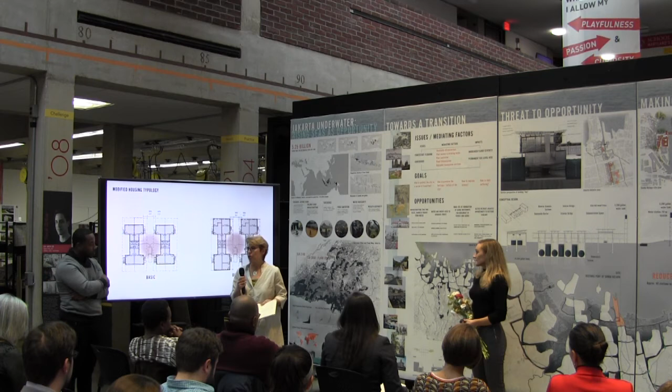So I want to start with your first question, which is, why is this a topic we should be talking about? I think that's such an important question for all of us to think about how we use our talents and our energy, because we're fortunate enough to have some choices. The fact that you started with that question, what is important for me to be thinking about today, is at every level so critical. Lauren and I talked a lot about the way in which we ask questions and how we frame questions.

And in the framing of the question and the rethinking of questions, it leads us to a whole different set of possibilities. We looked at the Rapido Housing Project, which is an idea about incremental change and rethinking of what happens, knowing places are going to flood.

So there are a few things I'd like to say about my appreciation for this project. First of all, you did start with a question and something you were interested in, and then looked for the place for that. And you started with this thread of water—her first image in the thesis.

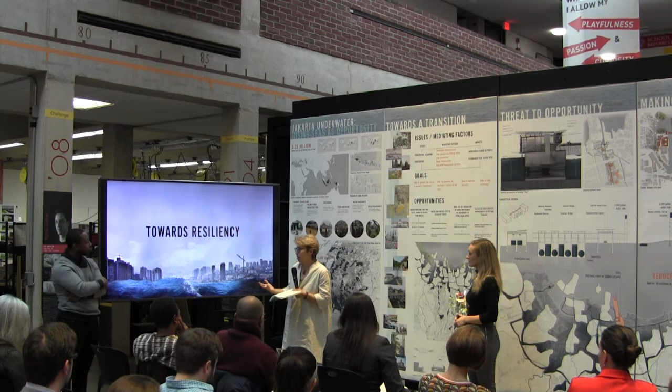This image, for me, asked the question in a different way. I think there was another part of it, because on one hand it showed that the city was being built upon constantly, and there was also the question of the idea—I'd only thought about the flooding in the past—but that the water coming in provided energy, that it could actually be a source of an economic engine. And it flipped it totally. We had an incredible conversation from that, because I had only ever seen it as a threat.

And I think it was that thread, pulling the thread of the water all the way down to the issue of sanitation and drinking water, how it affected the land and the culture.

Another piece of our conversation, as we read the news all the time, was why save this place? How do we argue for saving these different places, these investments? There was just an article about the Florida Keys recently, where the government decided they couldn't afford it.

So Lauren dug deeply into what's unique about this culture. As humans, we've created all these rich cultures around the world, and working to understand and build upon the assets and particularity of that culture in your choices, I think was also really key.

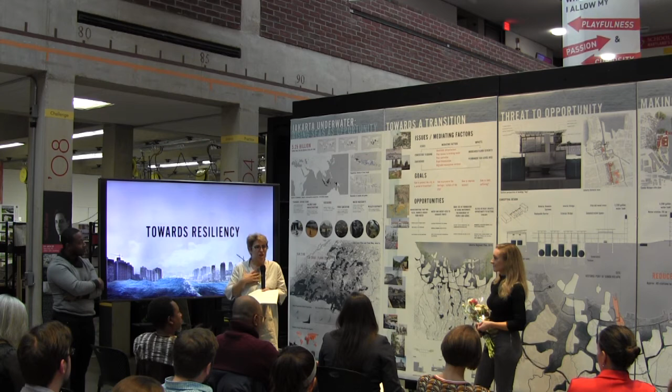Lauren had the amazing opportunity to visit Indonesia, but also Denmark and Japan, looking at how different cultures had dealt with the water. And when she came back from Indonesia, her face was all broken out. She looked really sick. She was physically sick, had a respiratory infection.

So she had this incredible opportunity to put her body in that place. We talked about holding that memory and experience in her body as a visitor she could leave, but that was such valuable information. She's healthy now because she gets to live here. But I think that physical experience, the smells, and also the wonder of the culture and the people and the food and the buildings, were all part and parcel of this.

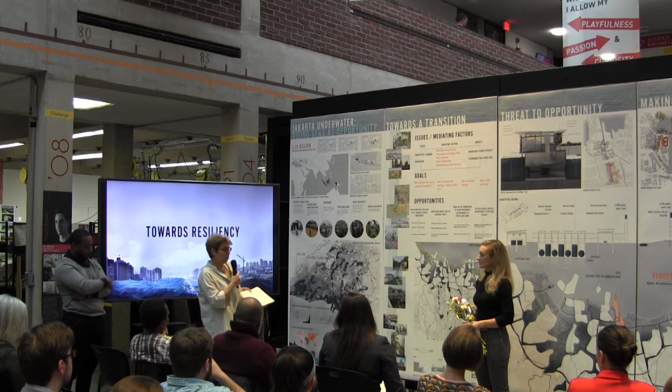I think the conversation Paul Dupuy and Marcus and I had with Lauren was also thinking about this idea. In the middle of her project, she found that the mayor had decided to move Jakarta. That wasn't part of the plan, right?

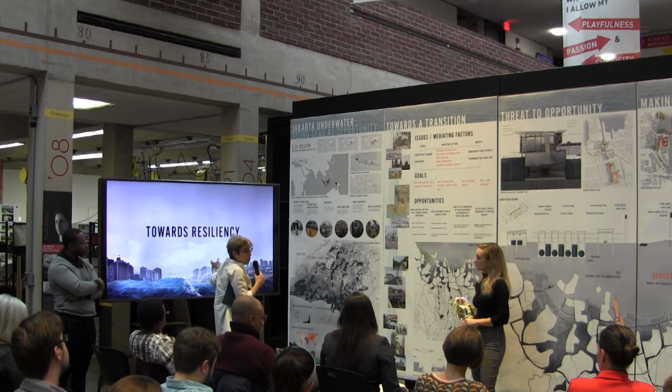So it also was a really key thing in the idea about how you build in flexibility and adaptability, how you think about time and how something changes and is in transition. I'd really want to applaud you for showing us how this could be implemented over time, what was going to happen over time, that it wasn't just a plan in the end. It was also the material of time, as well as the particularities of this place, but how these lessons could relate to other places.

The last thing we talked about was this idea of what happens to this stuff. It's now all polluted, right? What do you do with that? There are still many questions unanswered, more questions than answers.

We talked about how a strategy, an incremental strategy of a node eventually creating a web, finding that balance between what's fixed and what's adaptable. That it really comes down to architecture and public space and the communities that live there. And she didn't happen to mention, this building was designed so pieces could be added in and programmed according to community needs, scaled up and scaled down.

We also talked about the UN Sustainable Development Goals, and the idea that when we build architecture and do plans, we're thinking of the process, both in how it impacts the economy of a place, the education of the people, all those other pieces. That's a whole other thing she could start to talk about.

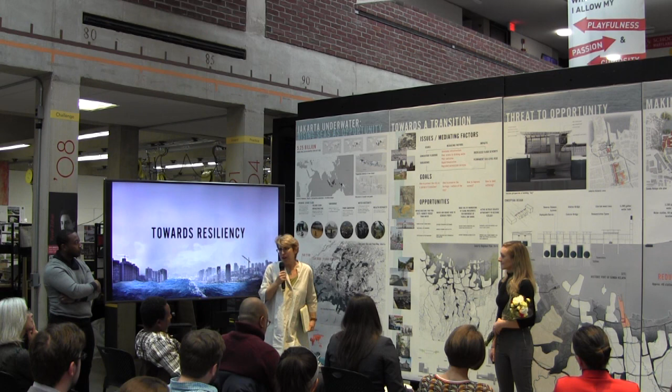I wanted to say, if it's not obvious, that every conversation I had with Lauren, she was like, oh yeah, I did that, okay sure, always on the next step. I can't remember the last time I started crying during a thesis presentation, but Lauren, tears really came to my eyes, both in terms of the possibility of taking on these issues, the meaningfulness of your project, and the power of what you've done. So thank you.